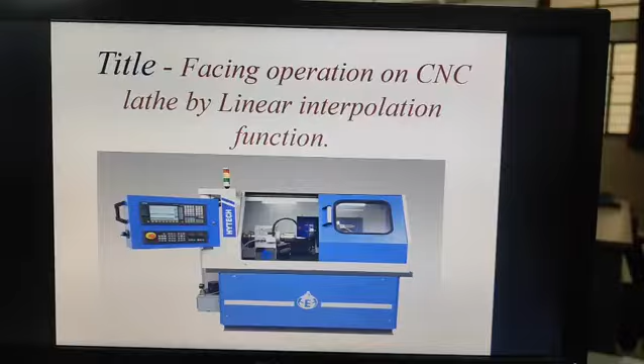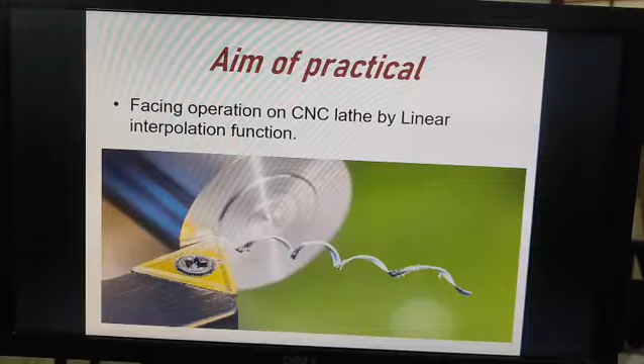The CNC machine in our workshop is from the Hytech company. Here we see the overview of the CNC machines. Then next, the aim of our practical is facing operation on CNC lathe by linear interpolation functions. Here we can see the facing operation image, how to do facing operations.

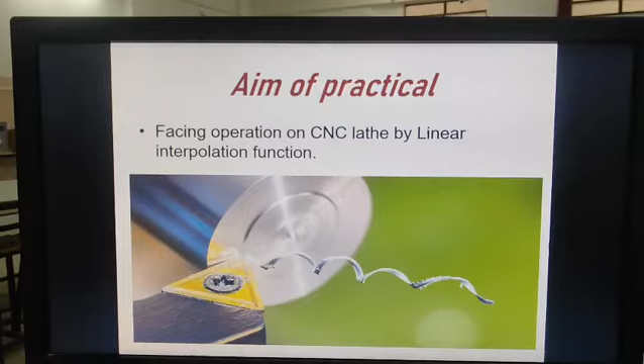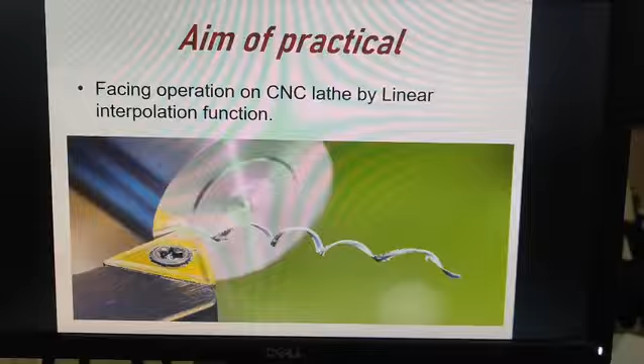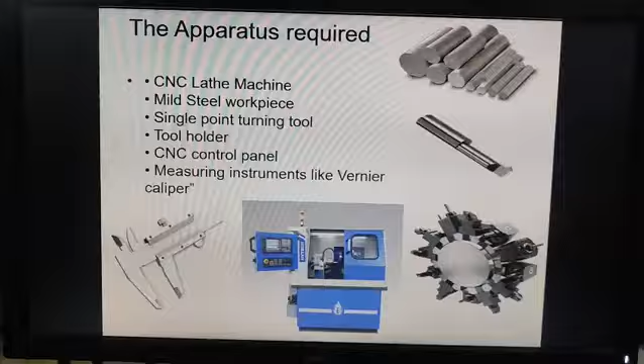The facing operation is a basic turning operation used to produce a flat surface at the end of a cylindrical workpiece. Next we can see the apparatus required to perform this practical. First is the CNC lathe machine, second is the mild steel workpiece, that is the raw material required for processing. Then next is the single point turning tool, the tool required to perform the process.

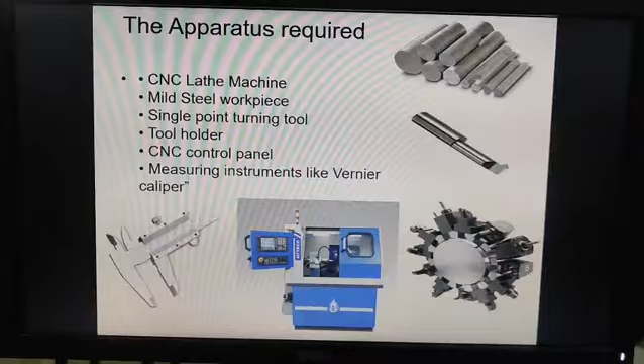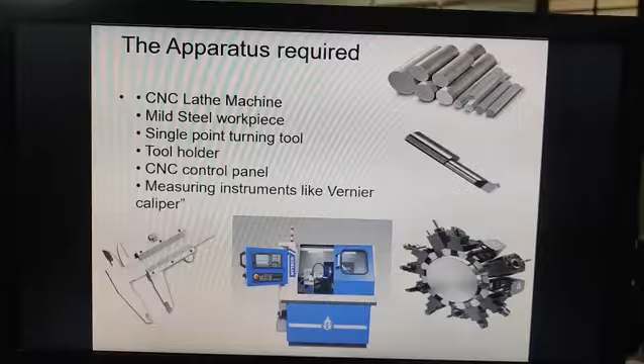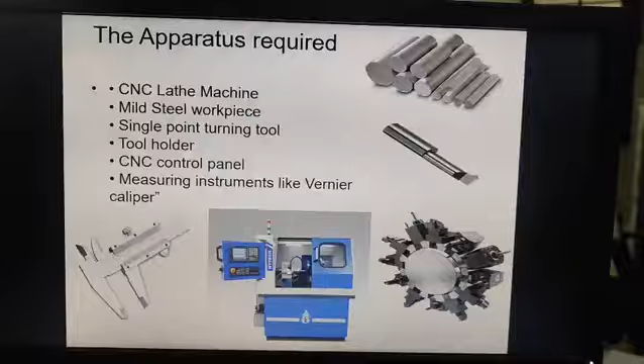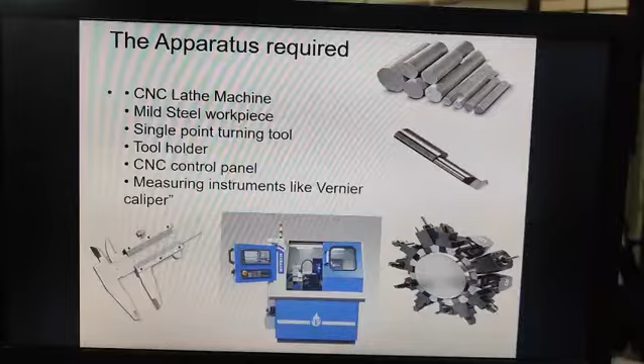Then tool holder; here we can see the images of all these instruments. The tool holder is used for holding the tools, and here we can see that a multi-point cutting turret is used. Here we can attach multiple tools on one turret and use it for processing. Then control panel, and next is the measuring instrument like vernier caliper. It's used after the processing.

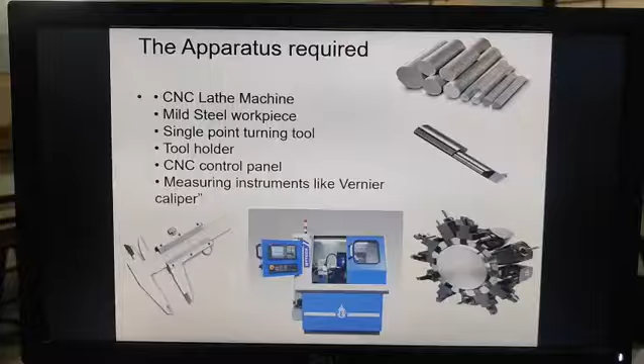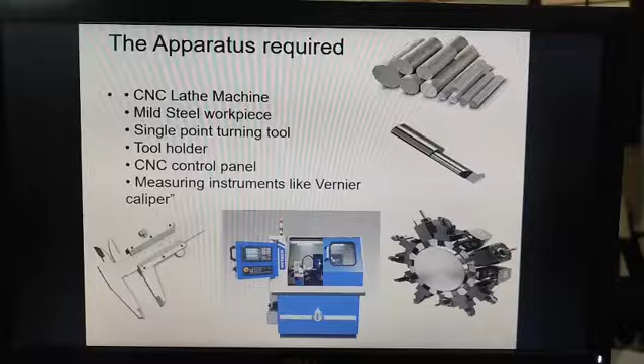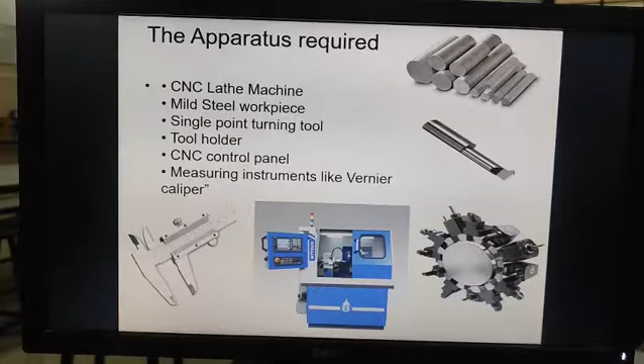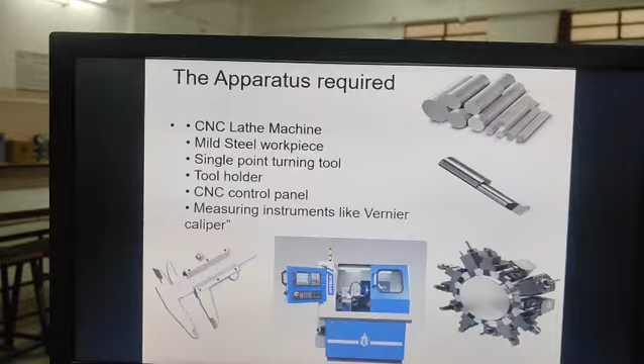The raw material used in this practical is mild steel, and the cutting tool is a single point cutting tool properly mounted in the turret of the CNC machine, and the workpiece is securely clamped in the chuck. The facing operation removes material from the end of the workpiece to make it flat and smooth. In CNC lathe, facing is performed by moving the tool along the X-axis using G01 linear interpolation while the spindle rotates.

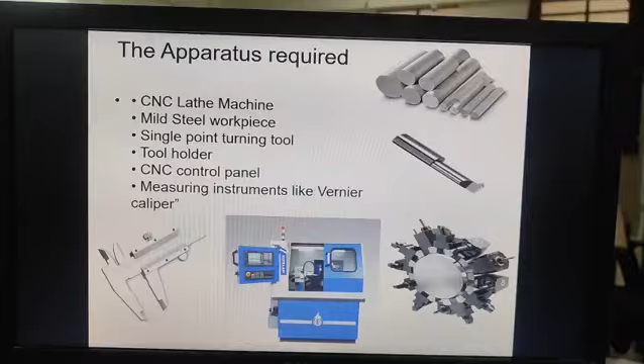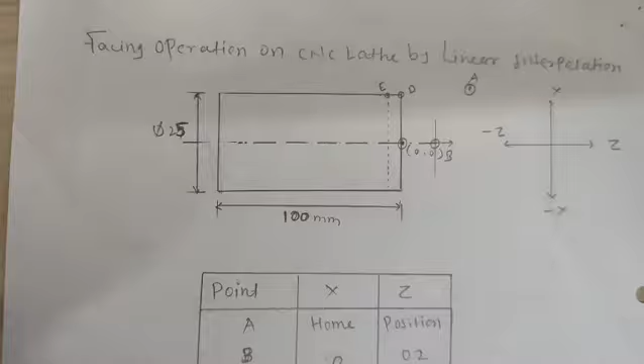Then we can see facing operation on CNC lathe by linear interpolation. Here we can see the diagram of the facing operation. The raw material given diameter is 25, given length is 100 mm, and we have to do the facing operation on one side, that is 1 mm. First we can see the axis identification.

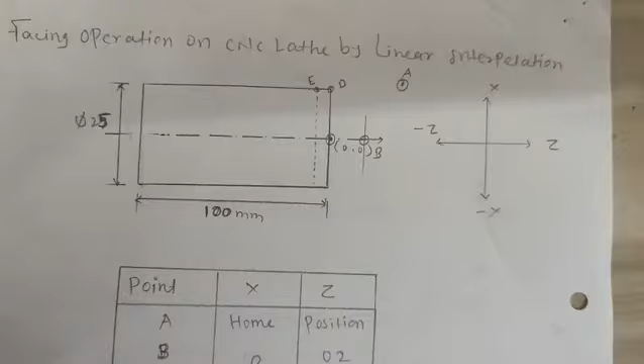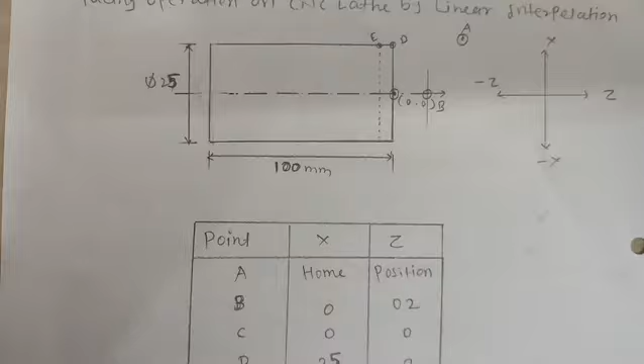The spindle axis of the CNC machine is always called the Z axis. Here our machine is the CNC lathe, hence our horizontal axis is the spindle axis, that is the Z axis, and the axis perpendicular to the spindle axis is always the X axis. Here we can see the points A, B, C, D and E. Point A is the home position of the tool. At that point there are specific coordinates.

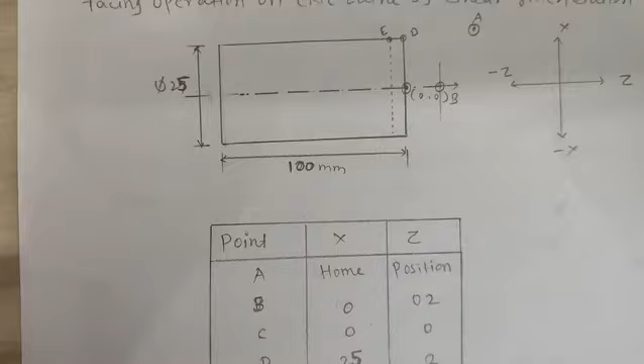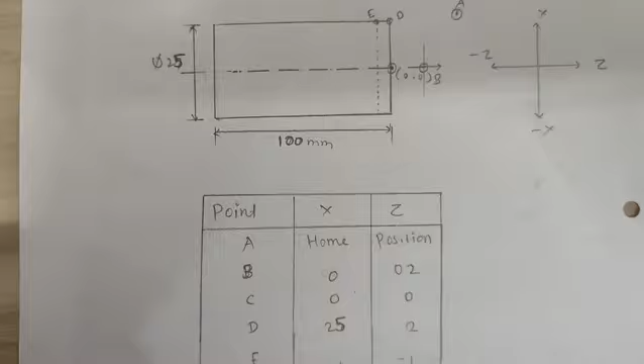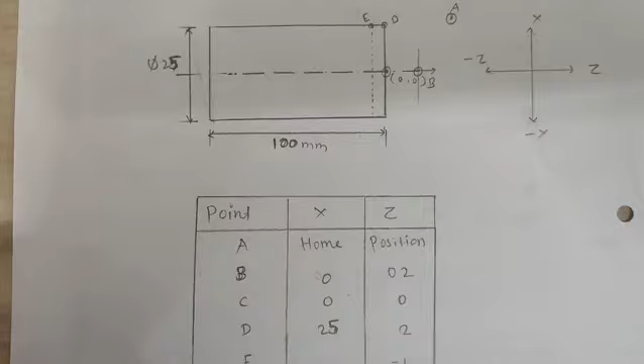Then the tool moves from point A to point B, where at point B the X coordinate is 0 and the Z coordinate is 2, that is the tool is 2 mm away from our workpiece. At point C there is the workpiece zero point; both coordinates are 0, 0. At point D the X coordinate is -1, that is our given diameter, and Z is 2.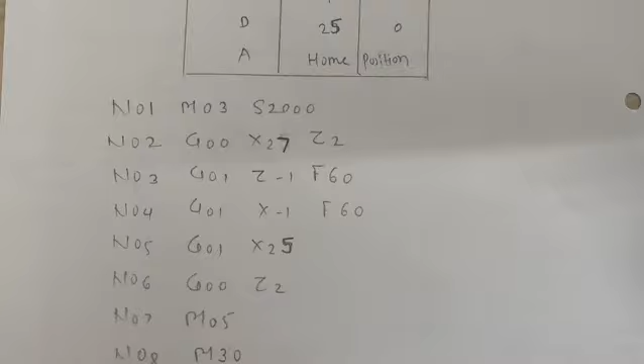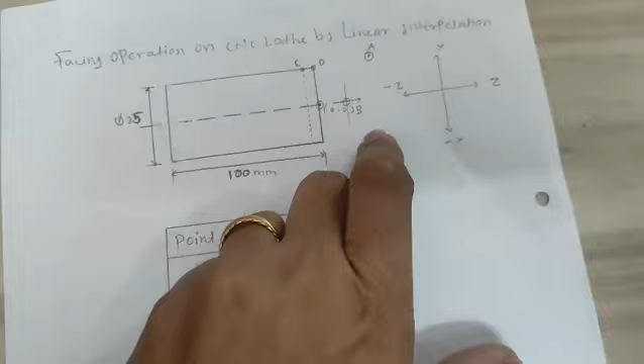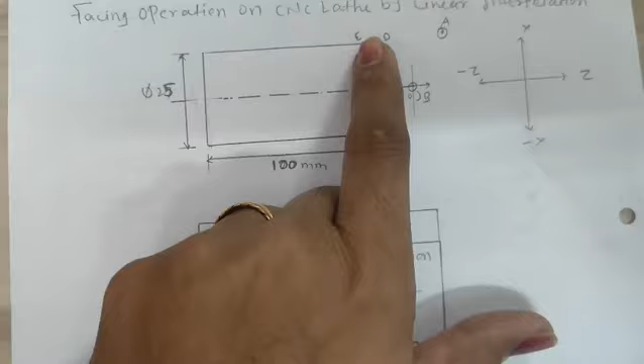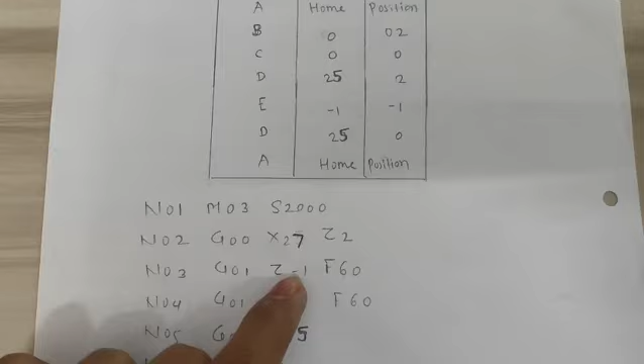The tool moves from home position A to point B, where the coordinates are 27 and 2. Next we can see N03; G01 is the linear interpolation. At point D we have to perform the actual machining process. From point D to E there is the facing operation, that is Z-1 and X is 25. Here the actual machining is Z-1 F60, that is the feed given to the system.

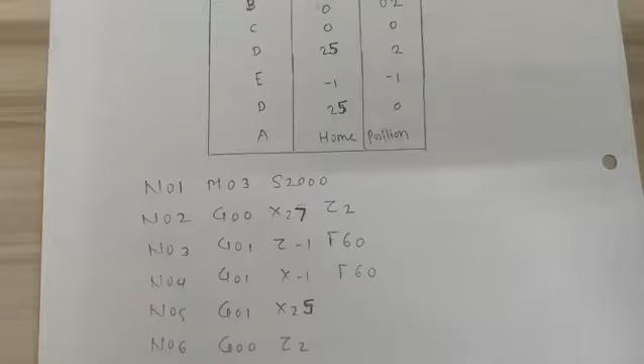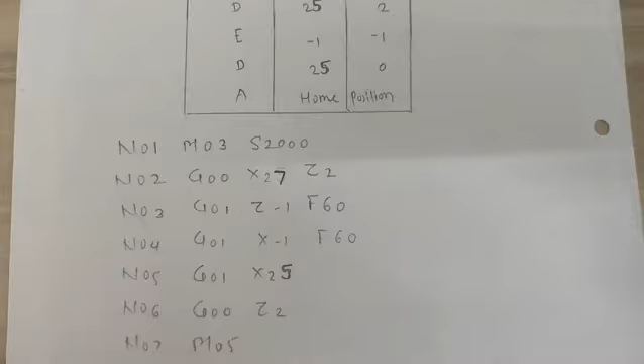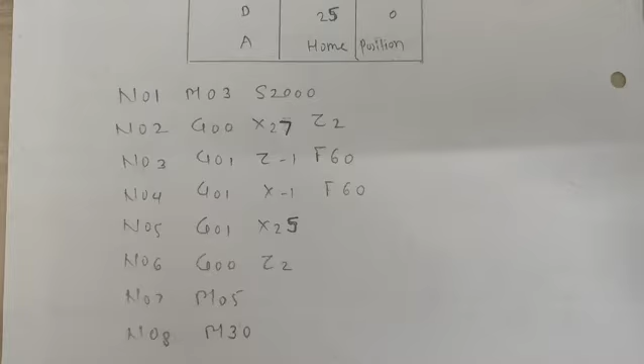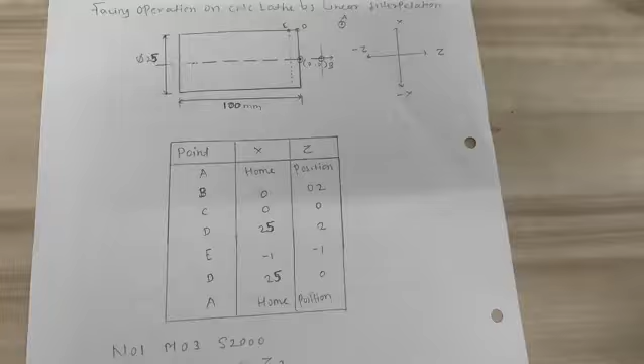Then N04 G01 X-1 F60; X-1 gives the vertical movement of the tool. Then next N05 G01 X25; after processing we have to take the tool to the home position. N06 G00 Z2, N07 M05 means spindle off, and N08 M30 means program end. Here is the basic program for the facing operation.

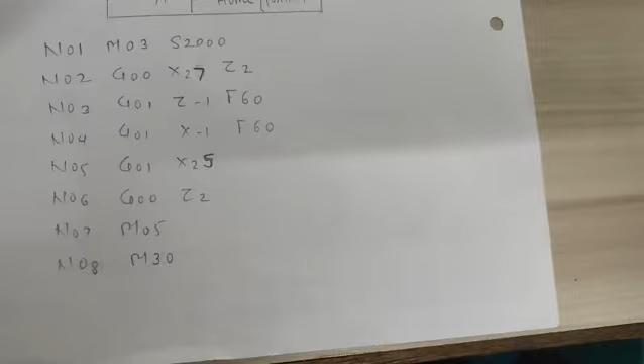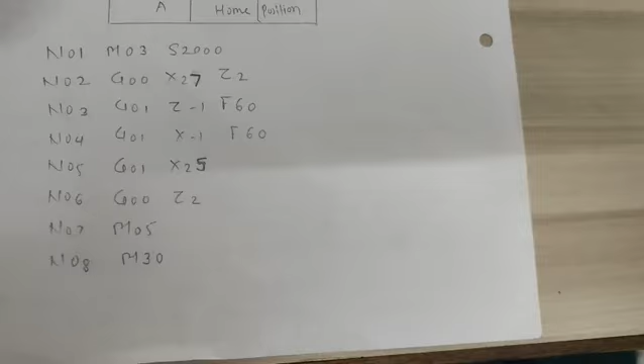After preparation of the program, we can see this program in CutViewer Turn for actual simulation of the tool. Then we see the simulation software. First open the CutViewer software. Then we go to File, open your program.

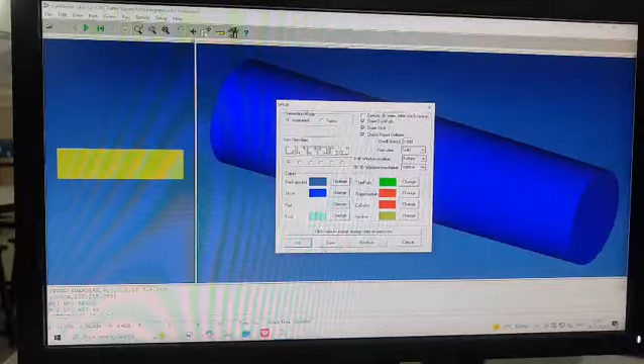Here we can see that our raw material is given. Here we open a previously saved program. After that we see in detail how to write a program and how to run it. In setup we have to give dwell time for understanding the simulation; we have to increase the time of the simulation. After that we can run.

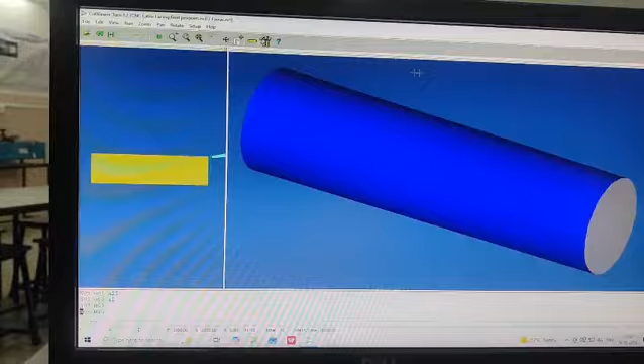We can rebuild the program, and here we can set the movement of the tool. Here we see the tool and its movement, and we actually see the facing operation. Then next we can see how to write a new program. For that we go to File, New.

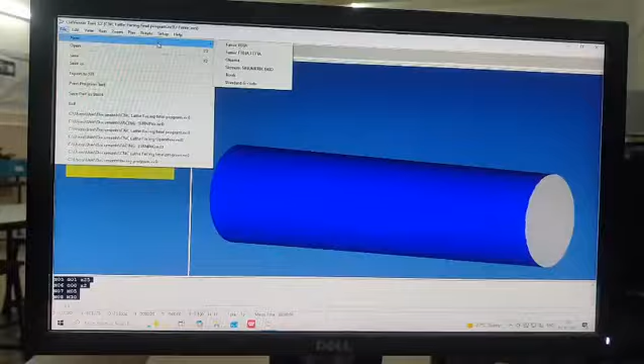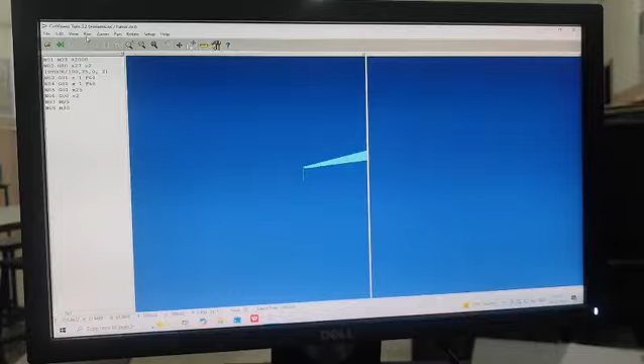Then we have to take the program window at the left. Here we can write the program. After writing the program we have to run it, rebuild. Here one tab appears: no tool found, do you want it defined? Then yes, okay. There we can see the simulation of the tool.